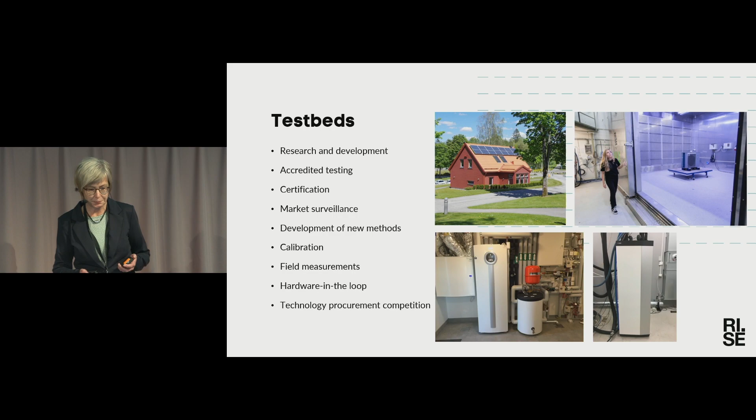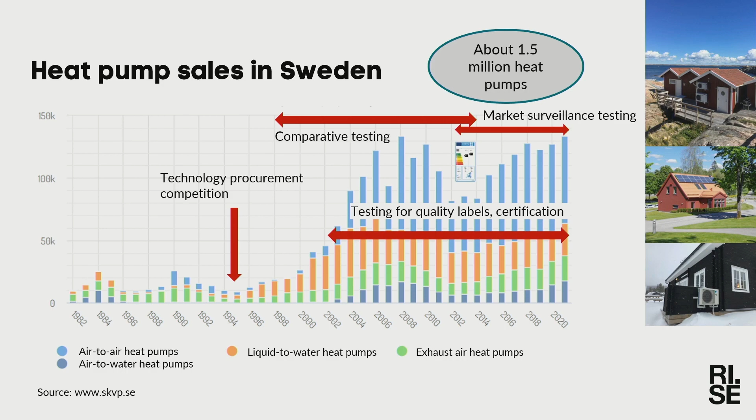And then we could see that the market took off, and during that period we performed a lot of comparative testing of heat pumps. They were later replaced by market surveillance testing when the ecodesign and energy labeling regulations had come into force. And during the whole period, we have performed a lot of testing for quality labels and certification schemes and so on.

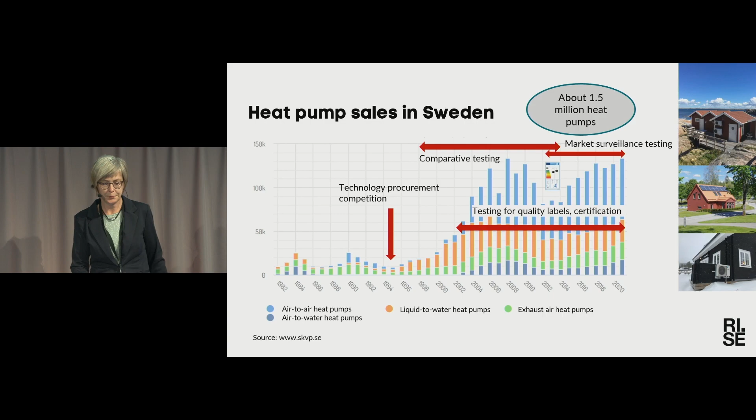When it comes to quality labels and certification, the Swedish sector and RISE have been really engaged in the development of such schemes. We started to develop our own P-mark in the beginning. It's not used anymore, but the experience and knowledge from that contributed to the development of other quality labels and certification schemes. And now we have the heat pump CEN Keymark at the bottom here, which is the most widely used European certification scheme for heat pumps today.

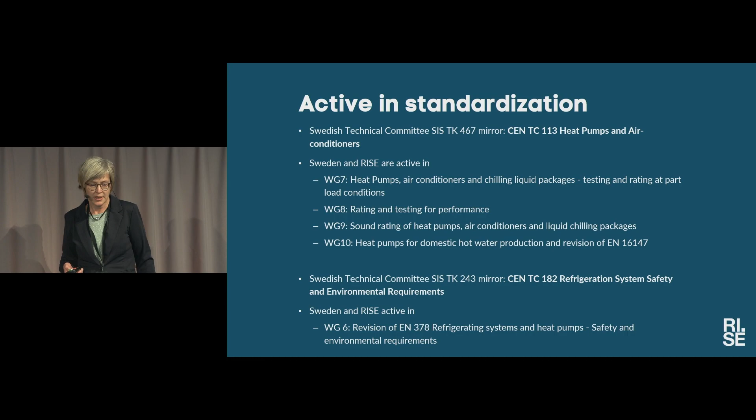When it comes to standardization, the Swedish heat pump sector and RISE have been really active. I will not go through all the working groups here. We do have Swedish technical committees that mirror the committees at CEN level. The first one mentioned here works with performance testing of heat pumps, and the second one with refrigeration system safety and environmental requirements.

I mentioned comparative testing before. It was performed on behalf of the Swedish Energy Agency in our laboratories in Borås for different types of heat pumps during different campaigns. The results from those tests were published on the Swedish Energy Agency website and served as information to end consumers. It also gave a good state-of-the-art assessment of the products that could be used by authorities and policymakers and so on.

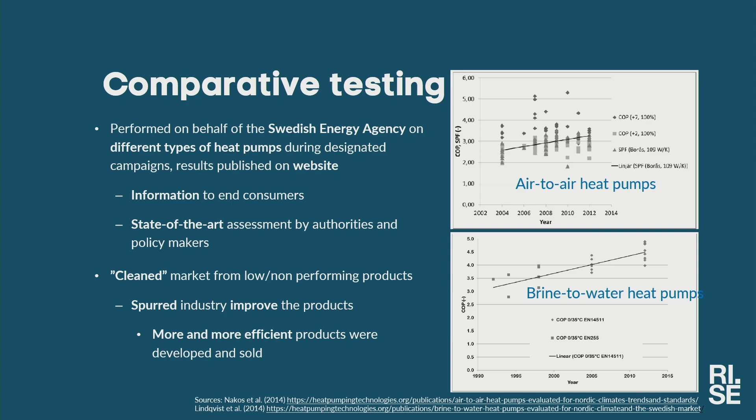Without going too much into detail, we can see there is a spread, but also a positive trend. So those comparative tests kind of cleaned the market of low-performing or non-performing products. It also spurred industry to develop more and more efficient products that were then put on the market.

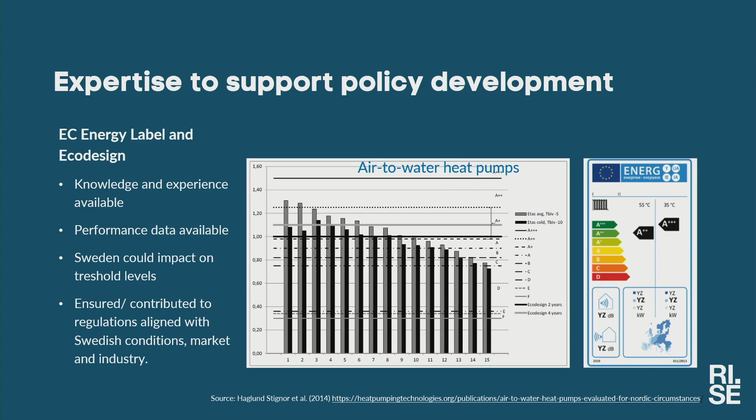And then when we came to the development of the eco-design and energy labeling regulation, in Sweden we had a lot of knowledge and experience and also a lot of available data that could be used by the Swedish Energy Agency. And thereby we could also have impact on the threshold levels designed.

This graph here is for air-to-water heat pumps. It shows different efficiency values of the heat pumps, and they were compared to the suggested threshold values, and then we could evaluate the impact of those requirements. And in this case, we could see that about half of the products tested would not pass the future eco-design requirements.

But then we knew that this would push the least performing products out of the market, which was actually on-off controlled heat pumps. It also ensured that the regulations were developed in a way that was well aligned with how we used the heat pumps on the Swedish market, which was by then the most mature market.

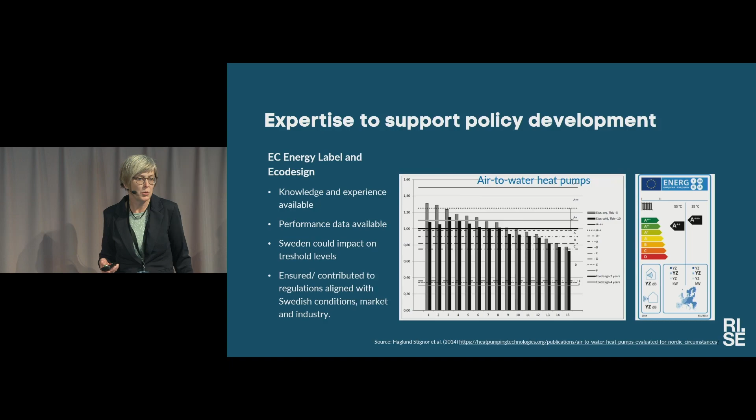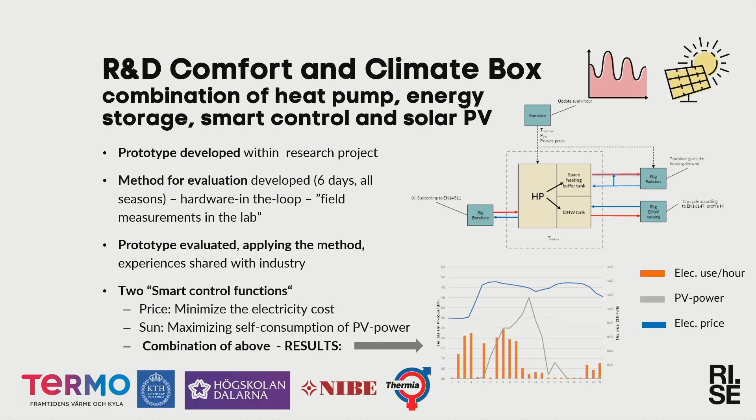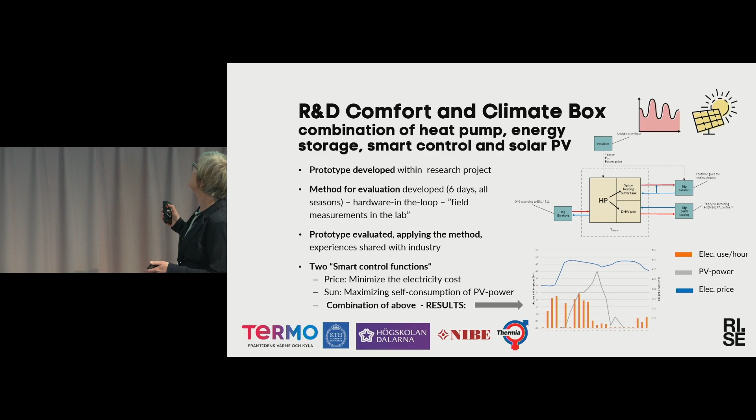We evaluated 2 different smart control functions, optimizing on price, optimizing on on-site produced electricity use, and combined this. And then we could see that, well, this works well. You can see here, sorry. It's here. We could see that the heat pump started to operate when the electricity price was low, and then it continued to operate when the sun came out, stopped, and didn't start again until the electricity price was lower again.

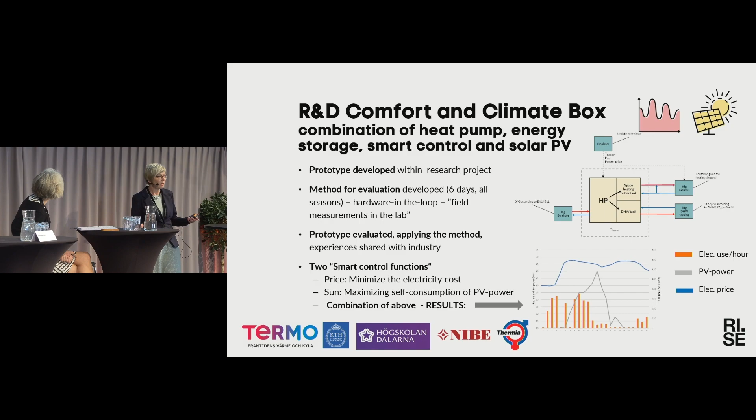So to sum up, to transform a market or a sector, to introduce a new technology, it's important that an innovation infrastructure is available and that all those parts exist. Everything from education, research, funding, test beds, certification, standardization, and so on.

And that said, all those things don't have to exist in all countries. Norway, for example, is one of the countries with the highest penetration of heat pumps in Europe. But still, a lot of those heat pumps have been tested in Sweden or in Denmark.

So next, further development. The technology is mature, well proven to work with existing refrigerants that we use today. But in order to reduce the climatic and environmental impact further and to adapt the product to the energy system of the future, the technology needs to be developed further, to develop smart, flexible and integrated solutions.

And also heat pumps that can operate in an extended operating range with higher efficiency, lower temperatures, higher temperatures for some types of buildings, district heating, and not least industry. We need to develop products and systems for refrigerants with reduced environmental impact, and also to develop products that are better adapted to a circular economy. And then it's important to ensure availability of an appropriate innovation infrastructure.

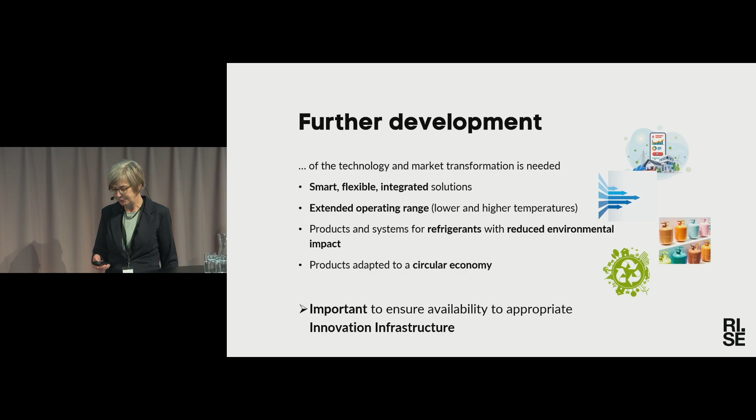I especially appreciate how you, with this long list of what we did in Sweden, what we now, when we look forward, can actually see what is the best, how can we pick the cherries, what do you say? Cherries. I can't speak English today. From other countries, since we are so different.

So what would you like to emphasize? Is it this testing and that you really were so early in the transparency here with the energy agency, etc.? Was that really the key, that people themselves could reach this information? It seems quite important to me. I think it's many different components here. Yes, the tight collaboration with companies and research, I think that's important, but also to build consumer trust. Yes. It's really, really important.